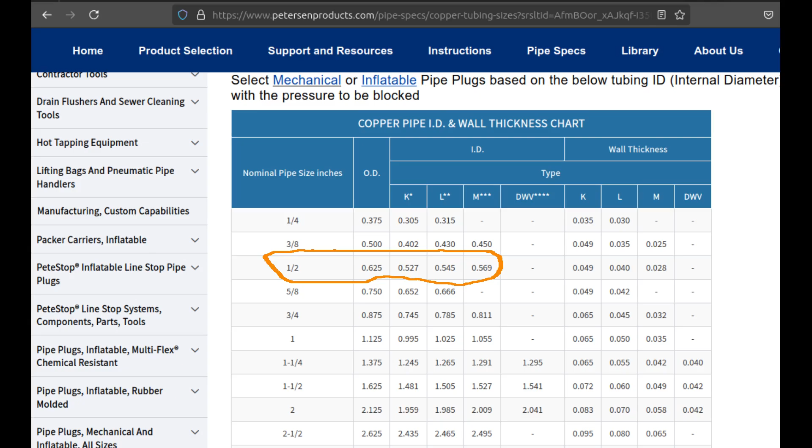The numbers I'm working with are about 680 thousandths of an inch inside diameter of the main tube here, and that's a very good match to a 1/2 inch copper pipe, which has an outer diameter of 5/8 or 625. And then I can assemble the A-frame of a prototype solo tent, which would be smaller than an 8x10 short wall.

For the ridge pole, as I said, I've got 4 tube sets here for 4 legs. I will reuse the ridge pole from the 8x10 short wall. I just have to design my tent to have an exactly equal ridgepole length, and it's 75 inches for the Snow Trekker short wall.

So what I'm showing here is a sketch by which I figured out the layout for the new tent design. As a reference, I've got the sizes for the Big Agnes Doghouse 4, my current tent, and the Snow Trekker 8x10 short wall, which I was previously using. They're shown in dotted red lines - that is the Doghouse 4, and that one there is the Snow Trekker 8x10.

My design is in the thicker black line. So in this plan view, it's a trapezoid rather than a rectangle. And over here in the profile view, the Snow Trekker is shown there, the Doghouse 4 is shown there, and my tent is also kind of a rhombus or something here.

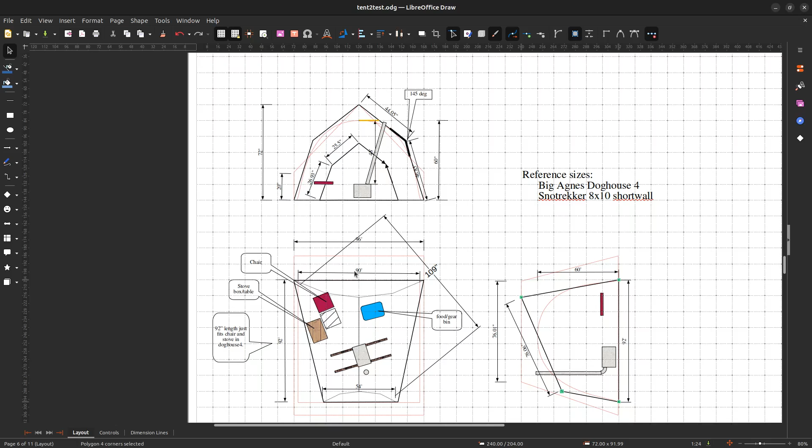Now, this setup shows the interior as it would be for the evening, cooking dinner, having breakfast, but not for the sleeping layout. So as a solo tent, for the sleeping layout, the idea is you take the food and gear bin, put it outside, put the chair outside, maybe move this little table, and then this is what you'd have.

Here's a 7-foot long rectangle which indicates my sleeping pad. It fits into the tent like this, and this little table thing could move and still be convenient for use in the middle of the night, just holding lamps and other gear.

So this is how I started the layout. I got it worked out in the 3 orthogonal planes, but in order to figure out the actual panel sizes for the different surfaces, the faces of the tent, it would be too hard to calculate those just based on these sketches in the orthogonal planes, these projections.

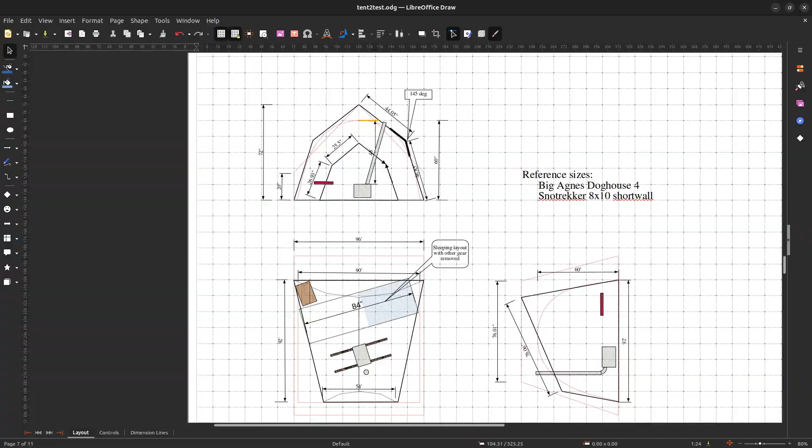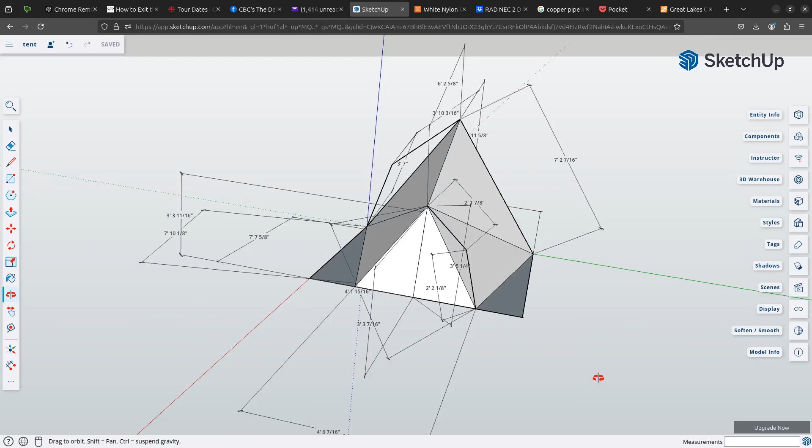So for that, I needed to create a parallel sketch of this thing in a 3D drawing program. So here I'm showing a similar diagram of this tent in the SketchUp program, and I've just sort of set out the basic shape of it and used that to generate all the dimensions and measurements I would need to size the different panels on the tent.

So again, it's basically an A-frame triangle tent, except one end of it is much higher than the other, and one end of it is wider than the other.

The next thing to mention here is that I had a little trouble while learning this from scratch on how to draw the slightly angled sides that I wanted. So I didn't end up drawing those as faces in this 3D SketchUp. Those are simply lines.

And this is the face there. That is just a line as I've drawn it. But I can still use that line to get the overall dimension of what the face would be if it was pulled out and over this point here.

And I have a similar one of those little lines implementing that angle right here. So that's nominally a 145 or 150 degree angle, and again, the idea of doing that as opposed to just having a straight A-frame, which is what the Snow Trekker is, is to push out the interior volume a little bit and to battle the tendency of this large face here to sag inwards without the help of guy lines or battens.

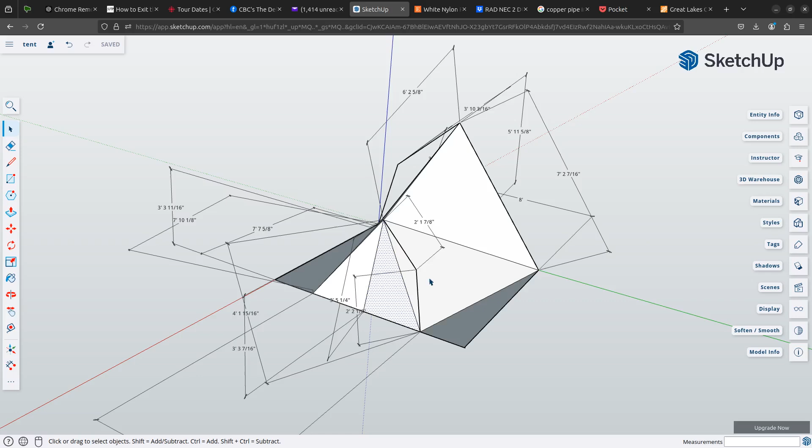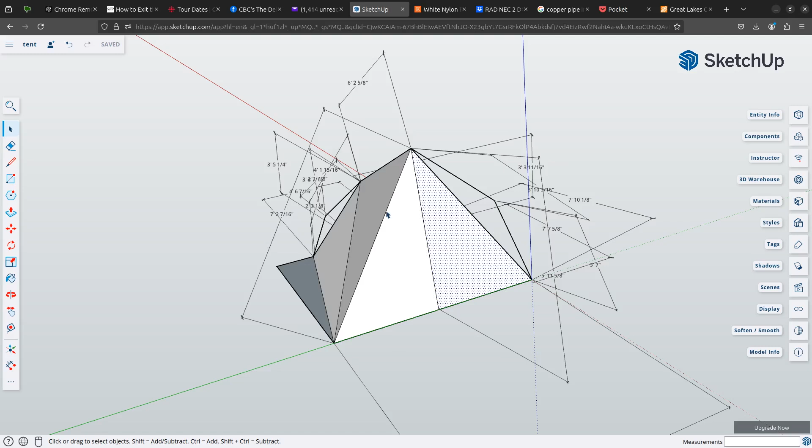So what you can now see here is all of the various dimension lines I drew to figure out the various panel sizes. There's going to be 6 panels, so an entire side is one panel. Then there would be 2 triangular or slightly modified polygonal end panels there, which can be sewed together. And then also at this end, the same thing, 2 of these panels. In fact, the true shape of the panel would be a 4-sided polygon implementing this angle here, but there will be 2 of them, one on that side and one on this side, and then they'd be not sewn together at this end. This would be a zipper to allow for a door.

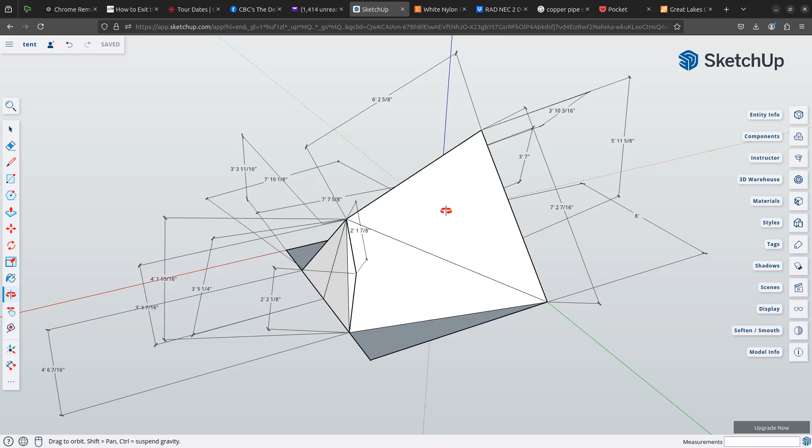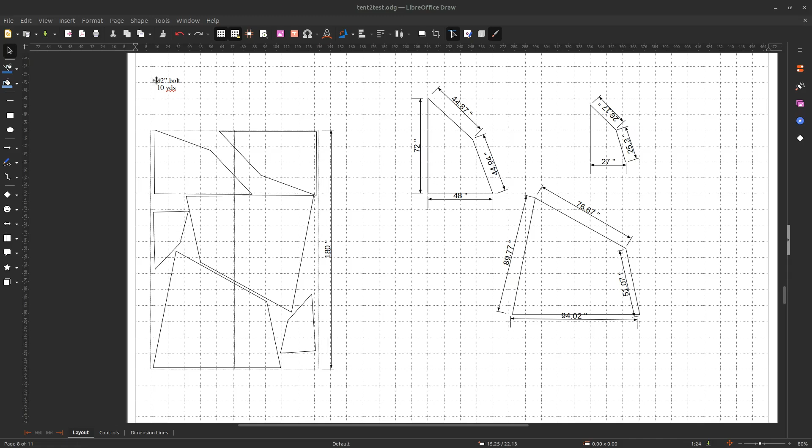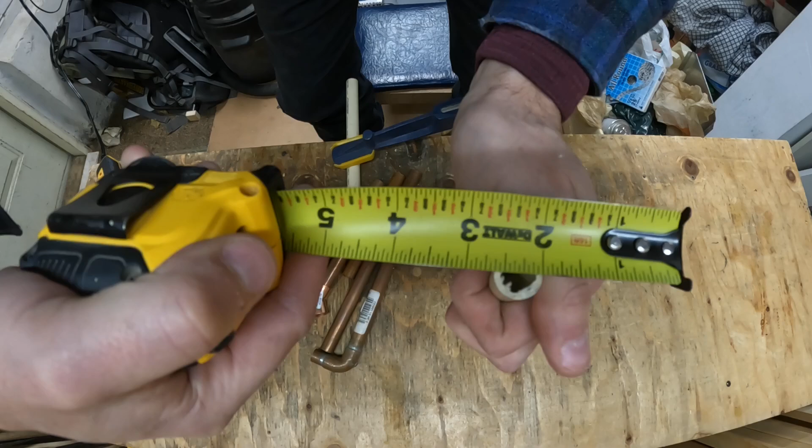I've got here some older tubing, which is possibly polybutylene, or maybe it's an old kind of PVC. I don't really know. It's not sold in the store anymore, but it just happens to be the exact 5/8 diameter that I need, and it's quite rigid. So if it's a thermoplastic, I can heat it and bend it to make my 150-degree angle out of this. So we're going to go ahead and give that a shot with the heat gun here.

All right, and we'll just let that cool for a minute. I can pull it out of the clamp. Pretty good.

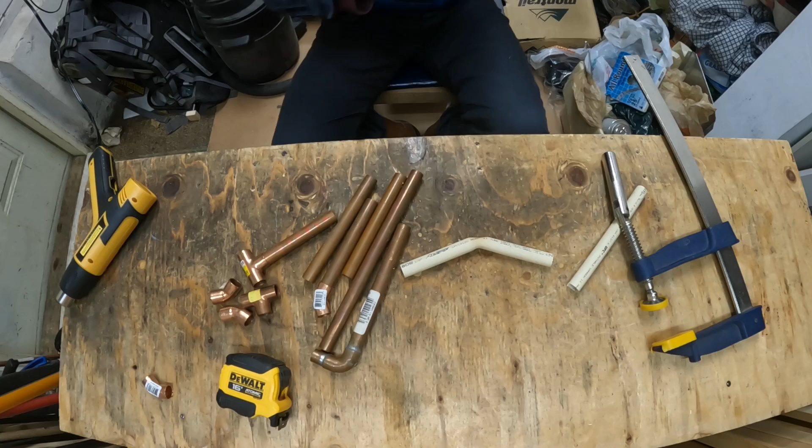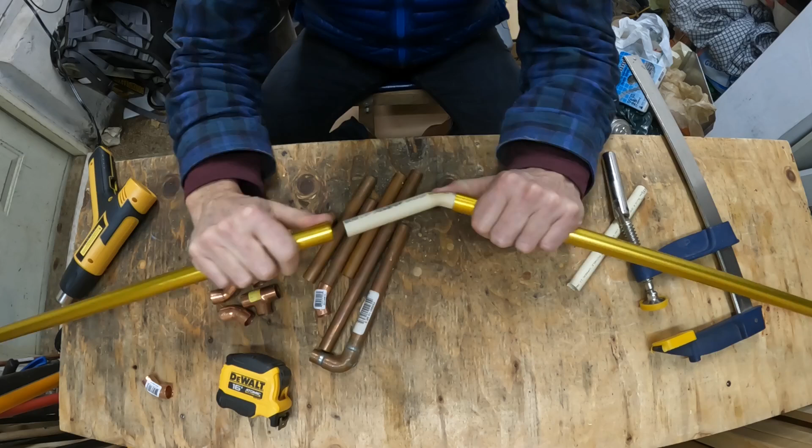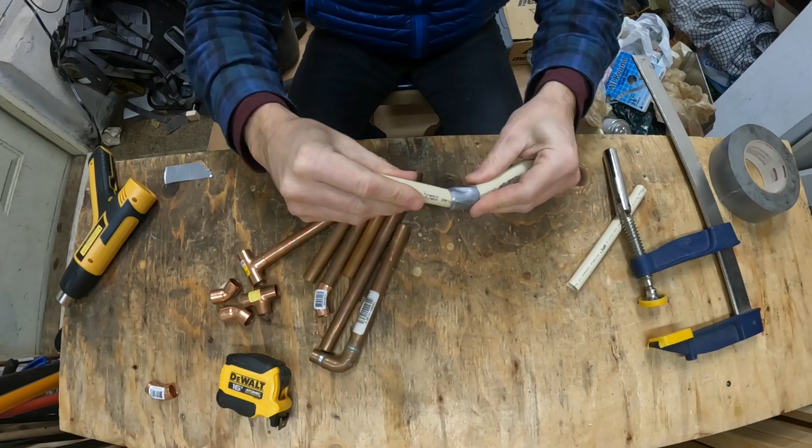And with the tubes, it would be like this. There's very narrow in the middle here, and the tubes would kind of bump each other like this. So what I think I'm going to do is wrap a little tape around the middle part there to just provide a surface for those tubes to bump up against. So there's kind of a surface there that these tubes could then sort of hit and provide a bit of support to the end of the tubes. They don't bang into each other or otherwise bungle the situation.

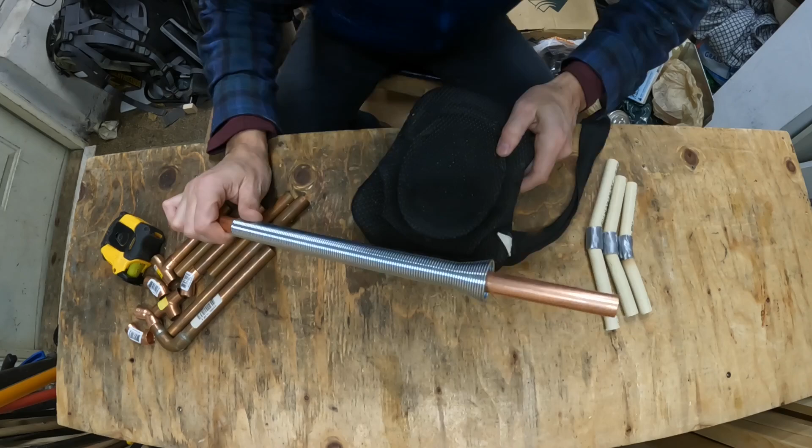So that's one way to make a 150-degree angle for these Easton tubes. Okay, I've got here 18 inches of half-inch copper pipe, and I'm going to try to bend this by hand using one of these pipe bending springs, and see if I can get the same result as one of these things. So, a little padding for my knee here. Okay, let's see.

Pretty hard to bend. It's going to be a little too hard to bend on my leg. I'll have to get a jig or something to bend it on.

Alright, so here's kind of a knee pad, and if I put this ABS tube underneath it, I might be able to bend it across that surface there. See if that works a little any better. I got the bend started here, so I want to keep going in the right direction. It's a little hard to see, but that's it right there, I think.

Starting to go. Almost there. I'm getting wrinkles though, which means I'm not making a good bend. This wouldn't be any good for plumbing, but so it goes.

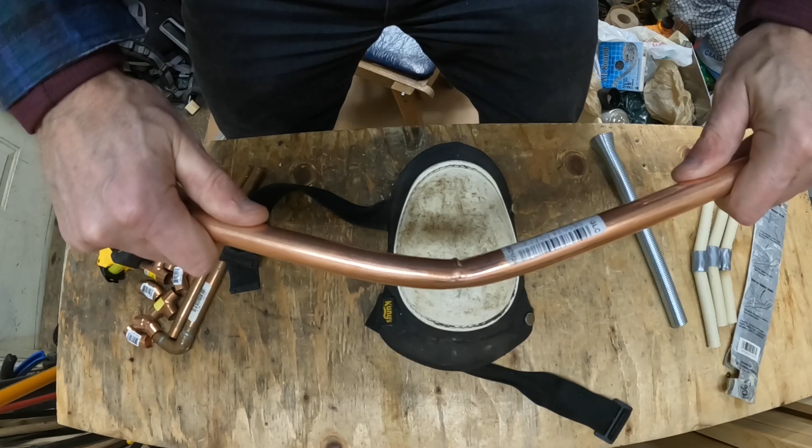Try to spread the bend out a bit more if I can get that. Oh, darn, that went too far. I buckled it. No good for plumbing, but it's not actually broken, so it might suffice.

Okay, so I had to use an 18-inch piece to get enough torque to bend it at all, but it doesn't need to be nearly that long, so I'm gonna just take off the excess here with a little pipe cutter.

And do the other side here. Got it trimmed down to size, and that's the angle there.

I should do a passably good job of it. Might not have got the full angle on that one. Came up a little short. So I got one more piece of copper, so let's try that.

Okay, this one's bending better. Looks like I'm not going to kink this one.

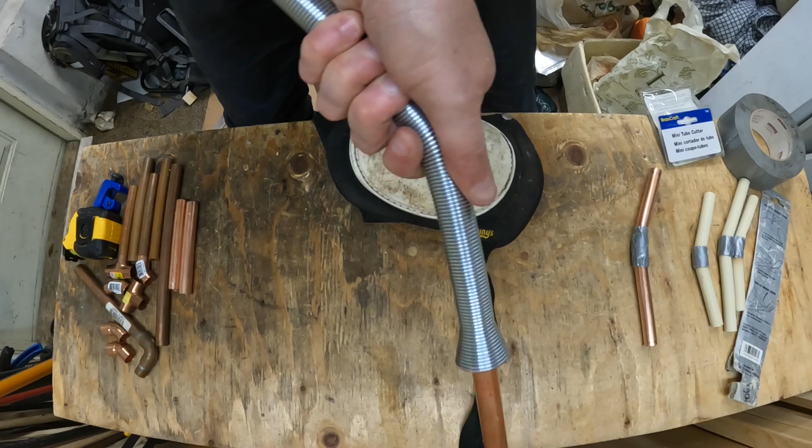That's probably okay right there. Kinked it again, not as badly. There's a real art to that.

So I got 5 elbows. I need 4 for the legs, and I've got 1 as a spare in case I lose one. Or who knows, it might even break.

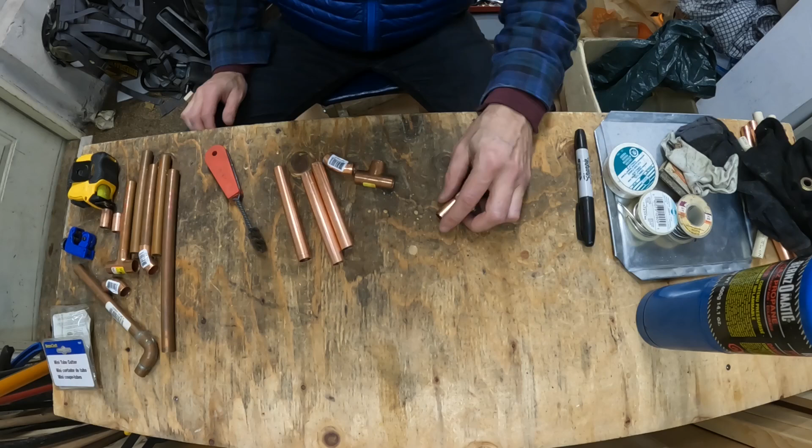Okay, so I need to make 3-way T's to attach 2 legs into a ridge pole. And the ones that came with the Snowtrekker could be used, but they're at the wrong angles. I have new angles now with the new design.

So I'm going to try to make a 3-way T using the copper fittings. Now I know from the sketch in 3D that I need approximately a 90-degree angle on the 2 legs, and then the angle onto the ridge pole differs from one end to the other, but say for the door end it's like 120 degrees.

So I can get a couple legs in here like this, and then so depending on how I solder this, I can get the approximately 120 degree angle going onto the ridge pole, and these are 45 degree elbows, so I get a 90 degree for the 2 legs.

Okay, so I need the 2 angles are about 130 degrees and 75 degrees. So for the 130, 180 minus 130 is 50, so using the phone as the protractor here, I need about a 50 degree angle.